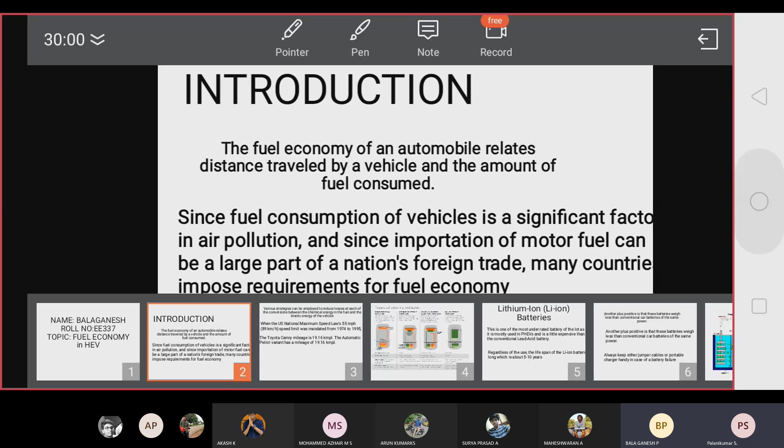Good morning. My name is Balaganesh. My topic is fuel economy in hybrid electrical vehicle, how to improve it in practical.

Now in hybrid vehicle we have two batteries and fuel. When the fuel and battery have been discharged, we want to refill the battery and charge it. After that, it does not have any air pollution and engine sound in hybrid vehicle.

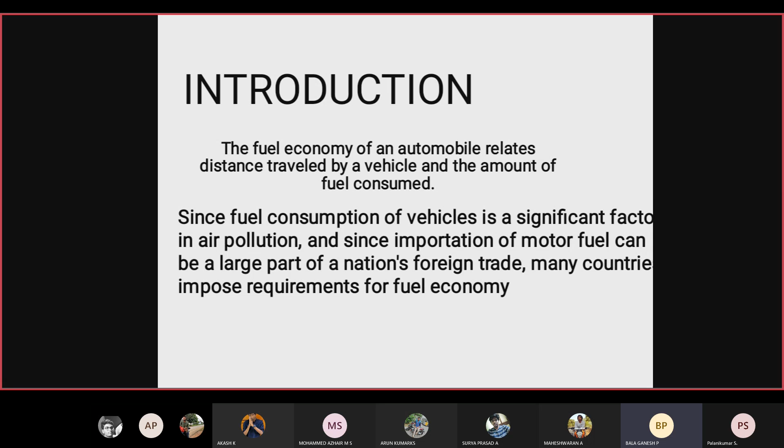Yes, definitely. And we have added battery to the front two wheels. Sorry, in olden times we have dynamo cycle, dynamo lighting cycle. That's why we can regenerate the battery without charging.

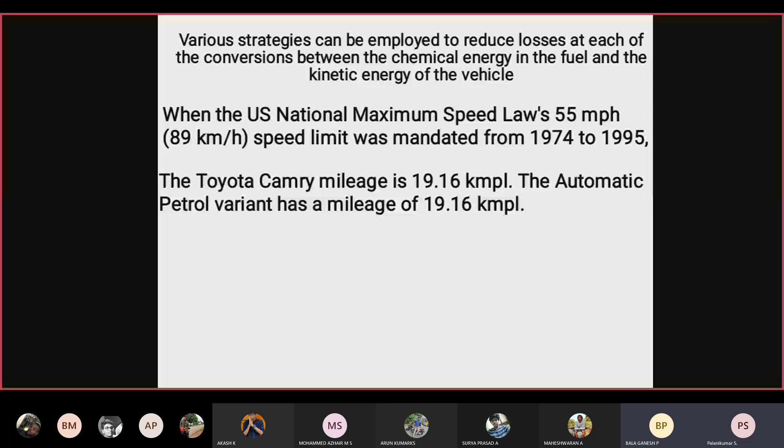We can move to long distance however we want. Automatically it can be recharged by generating electrical current, sir. So this is the electrical vehicle we have nowadays.

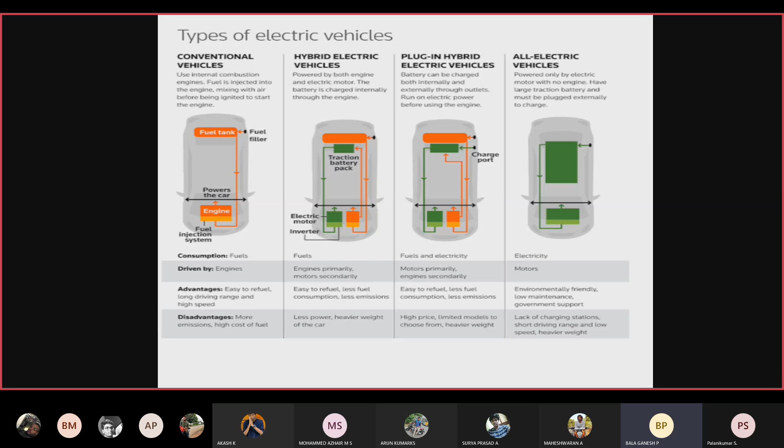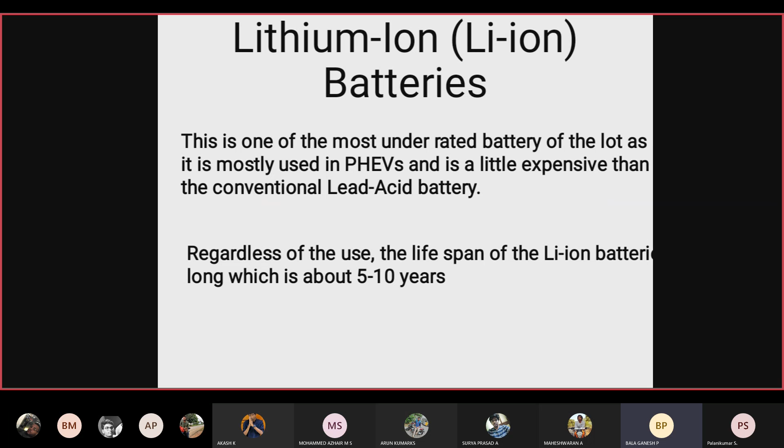We have in hybrid electrical system, batteries that can be rechargeable. It has long life, how many days, how many times we can recharge, how many years it has a long life.

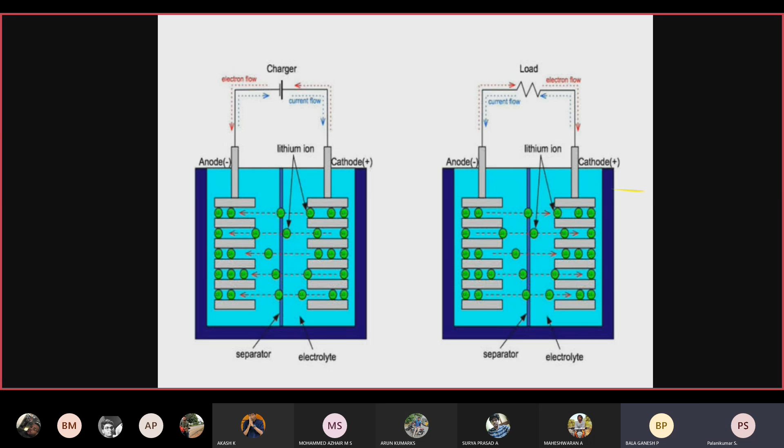It automatically charges when the battery is low. It automatically gets charged. When batteries are a problem, we can use the fuel for emergency.

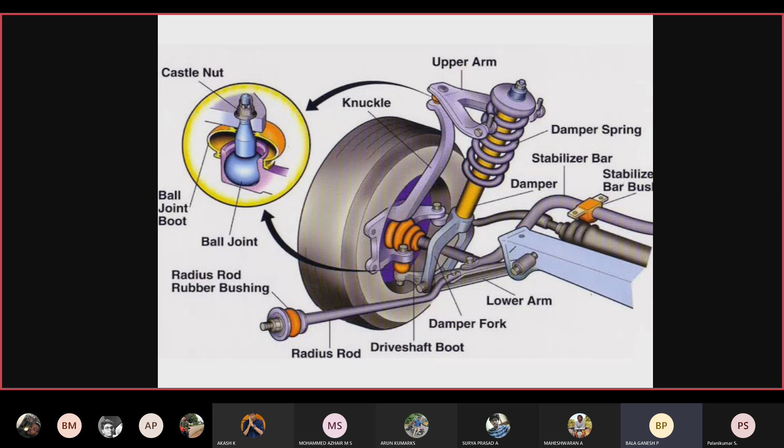So that's all. Thanks, sir. That's all. Yeah, only 2 minutes, 3 minutes.

That's it, sir. We can have rechargeable batteries. We cannot wait for the charging for 1 or 2 hours, it's automatically chargeable. And in older times, the cycle has worked by dynamo light. When we pedal the cycle, sir, the dynamo motor has been touching the wheel. It automatically recharges. This is okay.

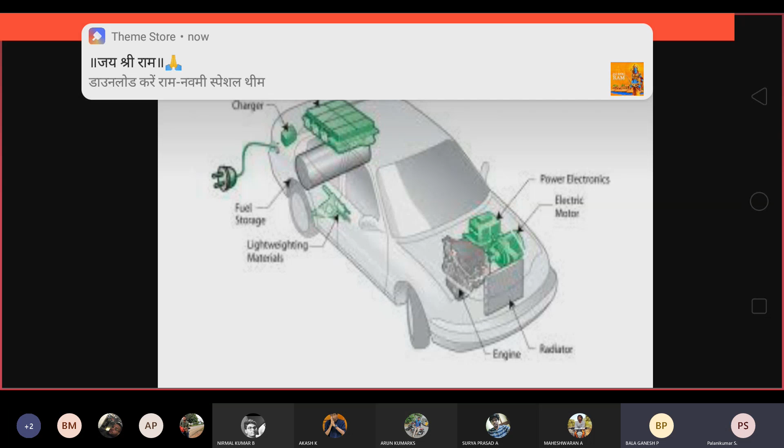Yeah, so whenever we are going for regenerative braking, okay, during the regenerative braking itself, it will keep on getting charged. Yes, sir. So if you see any driving pattern of any vehicle, whether it is urban, rural, or whatever it may be, for the entire duration many times, okay, it either decelerates or does regenerative braking.

Okay, we will apply brake or we will decrease the speed. Yes sir, in both cases, the energy can be stored, that is the best way to improve the fuel economy apart from these things.

Yes sir, likewise fuel cell. Okay, but as far as the fuel cell is concerned, it is not advisable as of now with the technological advancement, because we need 99.99% pure hydrogen, yes sir, and that is a very vulnerable gas. Okay, very highly reactive, and explosion may take place if you do not properly handle the gas.

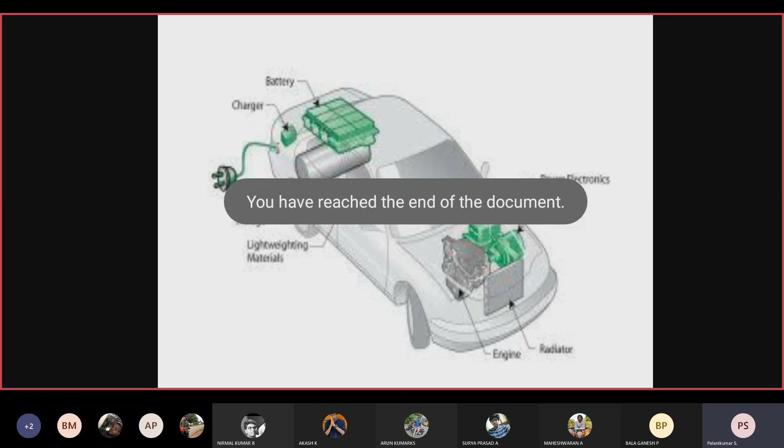Okay, so for electricity production, that is why as of now it is only considered for very large vehicles, buses, and trucks and multi-axle vehicles, where the fuel, that is the hydrogen, can be filled at only one station. Okay, in a centralized manner. Suppose a city transport corporation is there, we can make an arrangement in such a way that all the buses can fill the gas at one place.

Yes sir, absolutely possible. But whereas if you implement it in a mid-size hybrid electrical vehicle or car like that, then it will be very difficult, because we may not know the commuters, the person who is handling the car. Okay, only using the selected route. He may use his freedom, he is having a free hand, he can go wherever.

At that time, he may not find any refilling. So, fuel economy - when you're talking about this with the concept of public transport, we can also implement it because the ultimate aim is to minimize fuel consumption.

Yes sir, that also you can include. I think if you included this concept with battery, and taken some practical problems - readily validated data are available. If you incorporate that, additionally if ultra capacitor is implemented, for a distance of 100 kilometers, how much is the fuel consumption? If additionally fuel cell is also implemented in case of an e-bus or truck or any multi-axle vehicle, what may be the reduced fuel consumption?

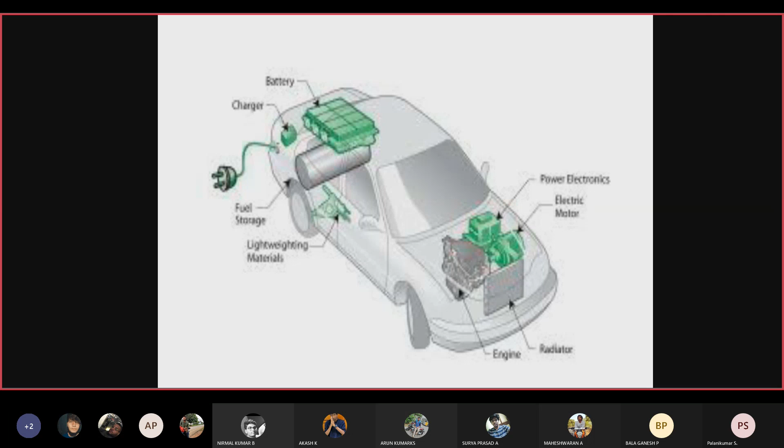Wait, wait. I will make you present. Okay sir, okay miss, now I'll share - present in my mobile only, sir. Yes, yes, he also presented using mobile only. When you play it, it will be visible. So instead of keeping it as is, okay.

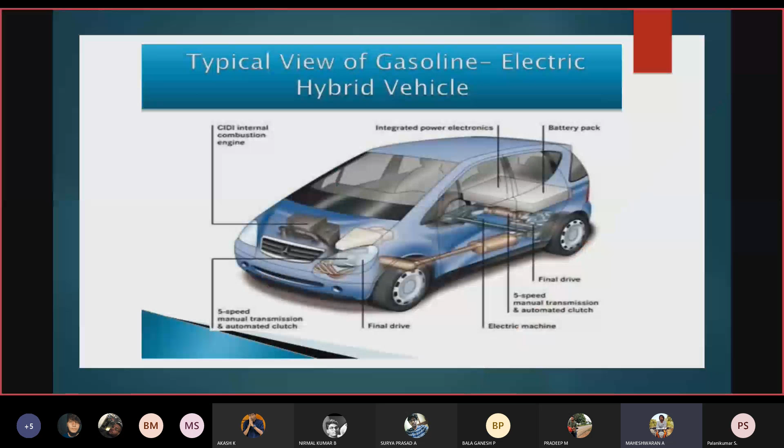In HEV, we can combine two power sources found in the hybrid car in different ways. One way is known as parallel hybrid, which has a fuel tank that supplies the gasoline engine, but the battery also supplies the electric motor. Both the engine and the electric motor can turn the transmission at the same time, and the transmission then turns the wheels.

In this HEV, we use the DC series motor in the hybrid electric vehicle. It can satisfy demand loading, high starting acceleration, and reduced torque. The armature is an electromagnet, while the field magnet is a permanent magnet, so the attraction and repulsion process can give power to the batteries. Using this concept, the car results in better efficiency and saves a lot of fuel today.

These are the hybrid components used in the car: gasoline engine, fuel tank, power device, transmission, and battery.

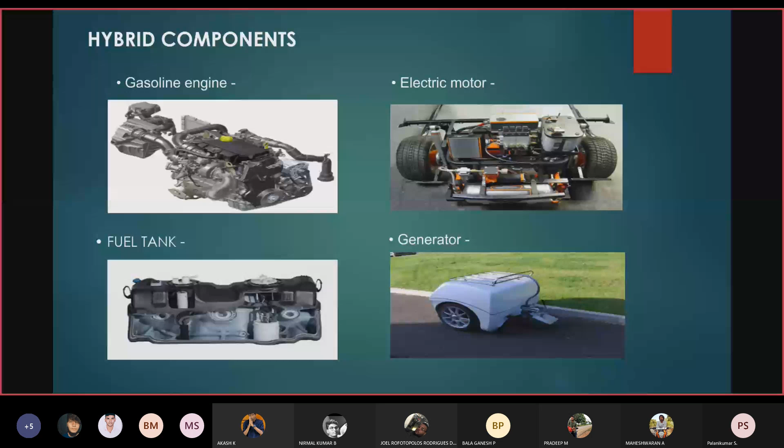These are the parts of the electric motor: armature, rotor, stator, commutator, brush, and magnetic field.

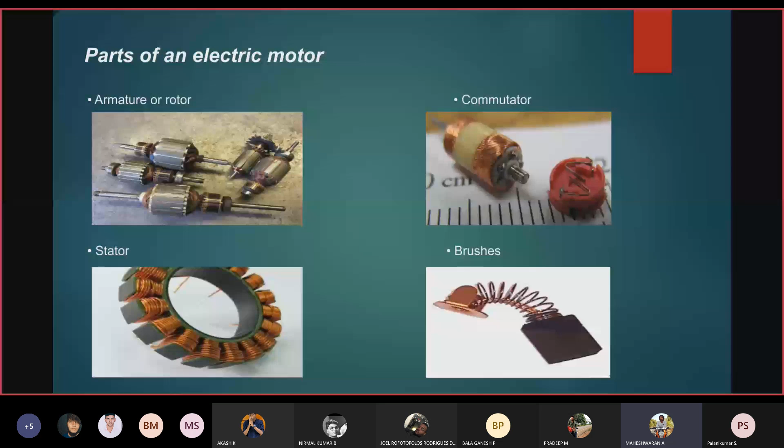The armature winding is connected to the external power source through the commutator, which the brush contacts. This mechanical rectifying device converts the alternating current and induced EMF of the armature to DC form.

Hybrids recover energy and store it in the batteries. Wherever we go, some of this recovered energy is stored in the battery. As the car goes faster, it has more kinetic energy; when the brakes are applied, that energy is normally dissipated as heat. A hybrid can capture some of that energy and store it in the battery to use later whenever needed. It does this by using regenerative braking.

Instead of using the brakes to stop, the electric motor that drives the hybrid car helps slow it down. The electric motor acts as a generator and charges the battery as the car slows down.

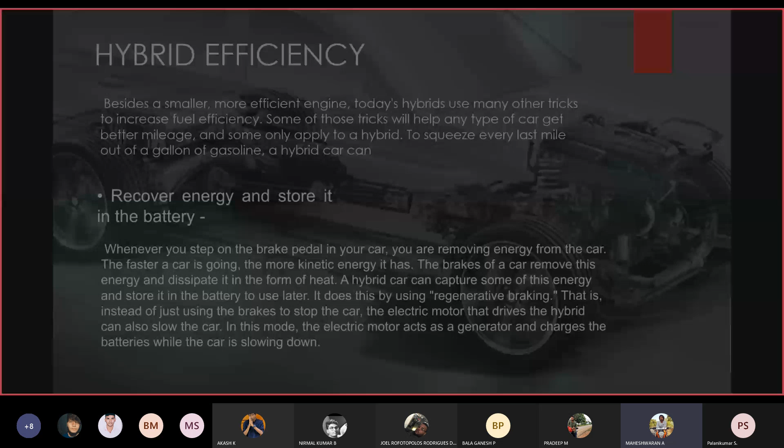The engine can shut down because the hybrid car does not need to rely solely on the gasoline engine; it has an alternate power source, the electric motor and battery. So the hybrid can sometimes turn off the gasoline engine.

But they rarely optimize efficiency since tires cause drag while driving. Hybrid cars use special, both stiffer and inflated, high pressure conventional tires, resulting in cars with reduced drag compared to regular tires.

It becomes smoother when compared to a normal ICE engine.

To conclude, using this concept, hybrid cars result in better efficiency, saving a lot of fuel economically in today's efficient world.

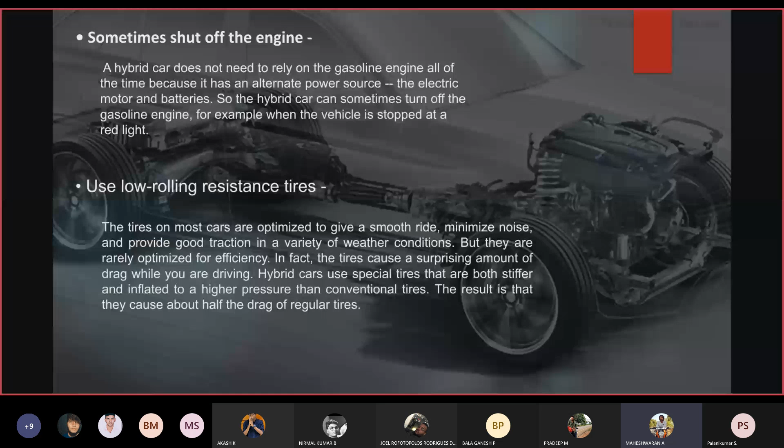Nowadays, Toyota, Hyundai, and even Tesla also use batteries, but they aren't classified as HEVs. With proper research and development, hybrid vehicles promise a practical, efficient, low pollution vehicle for the future.

This surely concludes the concept of battery efficient conservation and its value in today's energy efficient world.